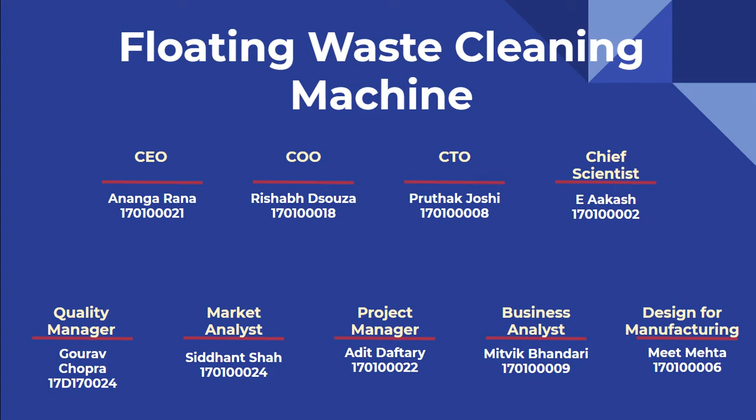We are the floating waste cleaning machine team, and our goal is to clean up plastic pollution in rivers. We know that on average, 2.4 million metric tons of plastic flows through rivers each year. Over two-thirds of these is carried by just 20 rivers, most of which are located in densely populated urban areas. Focusing on these rivers would help us tackle a large part of the plastic menace.

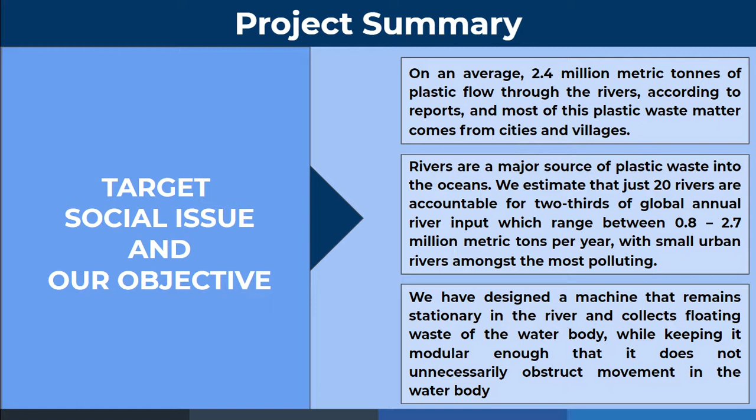In order to do so, we've designed a machine that is able to collect floating waste in the rivers while at the same time not obstructing movement within the water body. In order to arrive at the final design, we've looked at the problem that we want to tackle and we've looked at existing solutions for that problem. We then looked at shortcomings of those solutions and designed a machine that doesn't have those shortcomings.

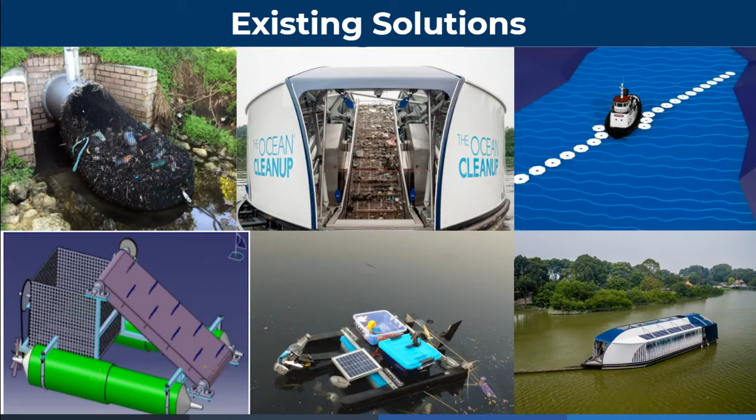The current existing solutions are of two kinds. The first are large permanent solutions which often block a large part of the water body. The problem with this is that this hinders the free movement of ships and boats and therefore can't be employed everywhere. The second type of machines are extremely small. These are able to collect only a small amount of plastic, which is inadequate for the large amount of waste that our society is generating currently. Therefore, we have designed a machine that is able to collect a large amount of waste while at the same time not blocking flow within the water body.

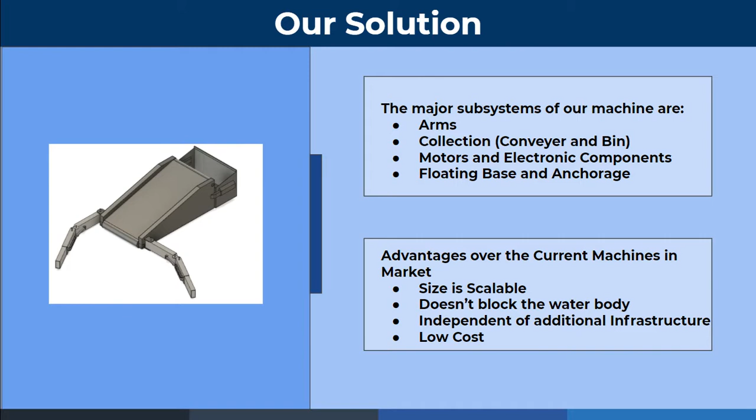Our machine is able to collect the waste through the use of two arms, which bring the floating waste to the mouth of the machine. From there, it is transported into a dumpster through a conveyor belt, which is partly submerged underwater. We've also ensured that our machine is low cost so that it can be adopted by governments worldwide. Now, let's look at each part of our machine in greater detail.

The first part is an arm, which is made up of three links. The main purpose of the arm is to cover a large surface area so as to collect a large amount of waste. The first link is made up of a mechanical stopper and is operated in an elbow-like motion. That link is able to resist the force of the flowing water so that it is able to stay stationary in water.

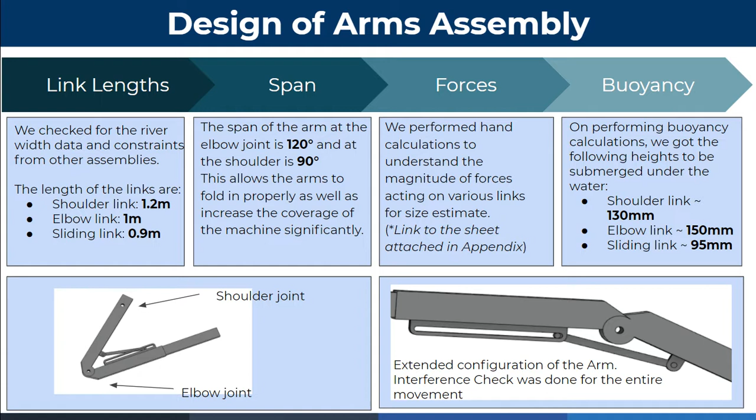The second link is operated in a bevel gear assembly which moves in and moves out with a drawer-like mechanism. The length of each link is kept around 1 meter so that the base doesn't experience extremely high levels of torque. The links are moved through motors which are going to be controlled in the base itself. Now let's look at an animation of how these links work.

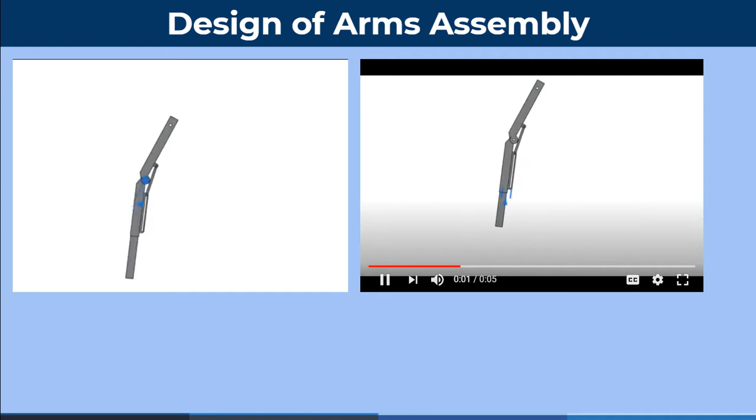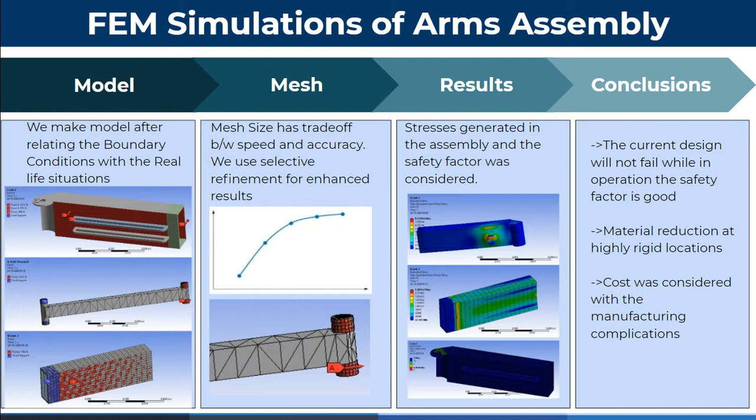We've also thoroughly done structural analysis on these arms to make sure that they're able to resist fatigue and tear in normal working conditions. We have looked at parts which are weak and we have specifically reinforced those parts to prevent against failure. Now let's look at the type of loading that is going to be present in these arms during normal operation.

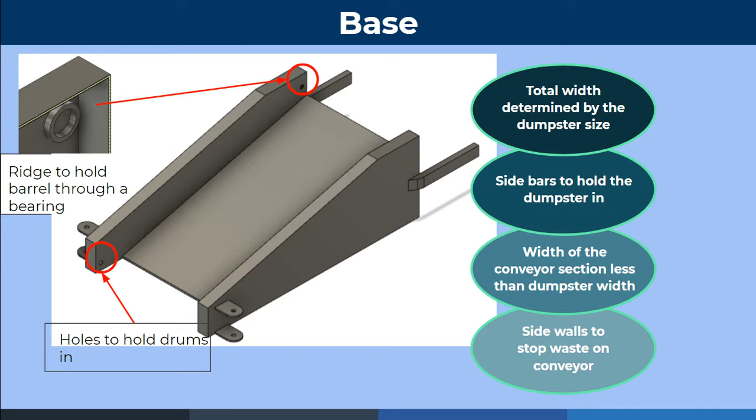The second part of our machine that we're going to look at is the base. The base is the part that holds all other parts together. The arms are joined to the base at the front, and at the rear, the sidebars are used to keep the dumpster in place. The base is made up of marine grade coated 4 mm steel, and the different panels are joined using rivets. We have ensured that the base is large enough to hold all the various parts together, but also small enough so that it doesn't obstruct the flow of boats in the river.

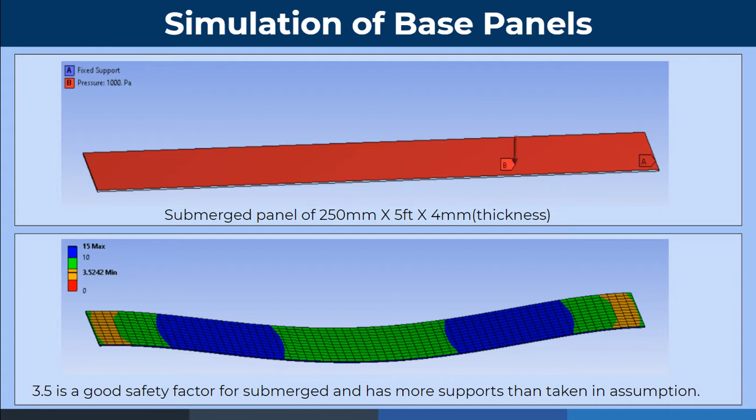We've ensured that our base is sturdy enough so that it doesn't fail in day-to-day operations. We found it to have a minimum factor of safety of 3.5, which will be actually higher in normal operations because it will have more supports than what has been taken in the simulation. We finally needed to ensure that our machine is able to float.

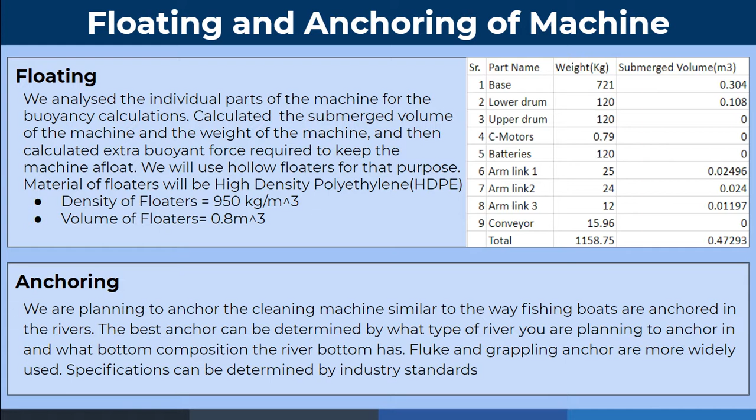For that, we have calculated the total weight and the total submerged volume of the machine, and we have found that it will require additional buoyant force. In order to provide this, we have designed hollow floaters which are made up of high density polyethylene. We've also ensured that the machine will be able to anchor in a river. We have designed different types of anchors which will be able to anchor that machine depending on the type of riverbed it is placed in.

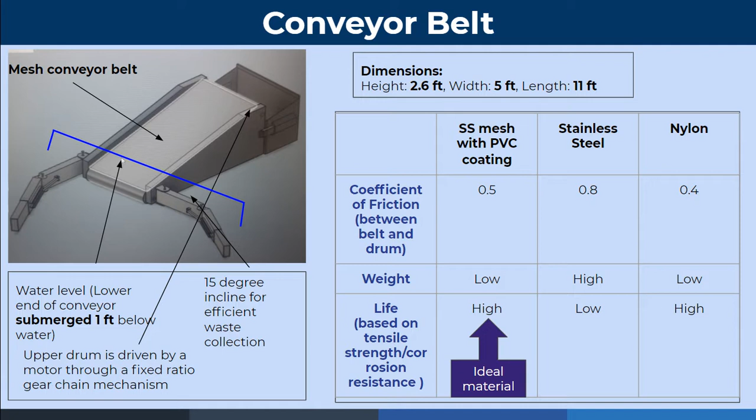The final part of the machine we're going to be looking at is the conveyor belt itself. The conveyor belt transports waste from the mouth of the machine to the dumpster. The lower part of the conveyor belt is submerged 1 foot below water, and the upper part of the conveyor belt is rotated through a motor. We have selected stainless steel mesh with PVC coating for the belt itself because it has a high life and also an adequate amount of friction.

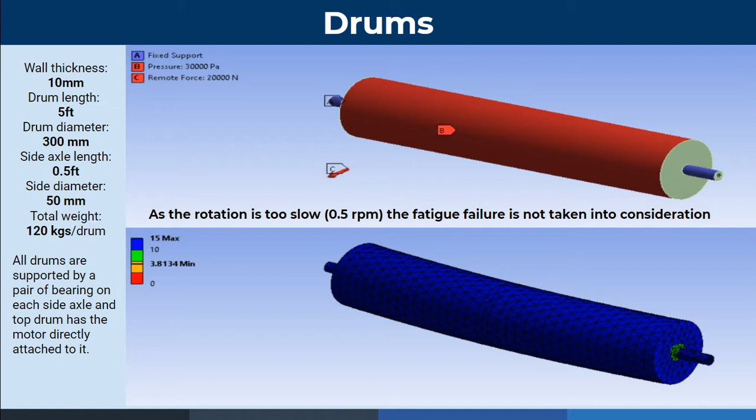The drums of the conveyor belt are what drives it. These drums are connected to a motor through a fixed gear ratio mechanism, and we have ensured that the drums also are adequately safe from failure. The motor that we have used is primarily used to run the conveyor belt. We've ensured that the motor has a high enough torque of 47 newton meters so that it can power the conveyor belt in most day-to-day operations. We've chosen the motor to be small so that it is able to fit inside the machine and doesn't

unnecessarily increase its size. The battery that powers the motor is going to be rechargeable and also lithium ion powered. This is chosen because of its high energy to weight ratio, and it is able to power the machine for up to a week on a single charge.

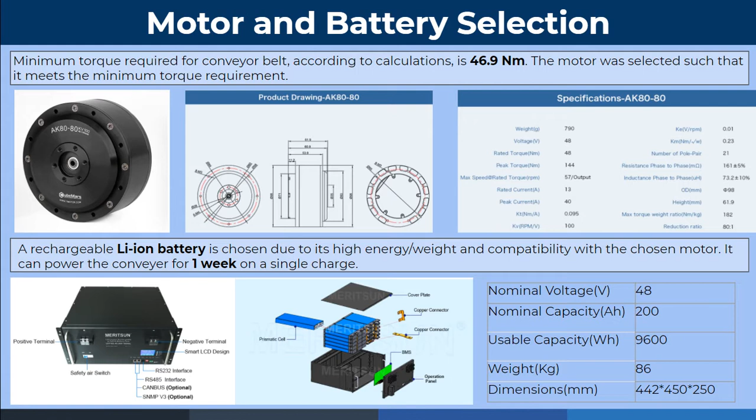The type of people we're going to target who are our potential customers aren't going to be private organizations. River cleaning is largely a governmental entity, and we think a large amount of our customers would be governments or government partnered NGOs. We think they would also be able to afford our machine because river cleaning is something which has received a high level of funding recently. For example, the Ganga River Cleanup Project has received about 1500 crores in funding, and as you will see later on, our machine only costs a very small fraction of that.

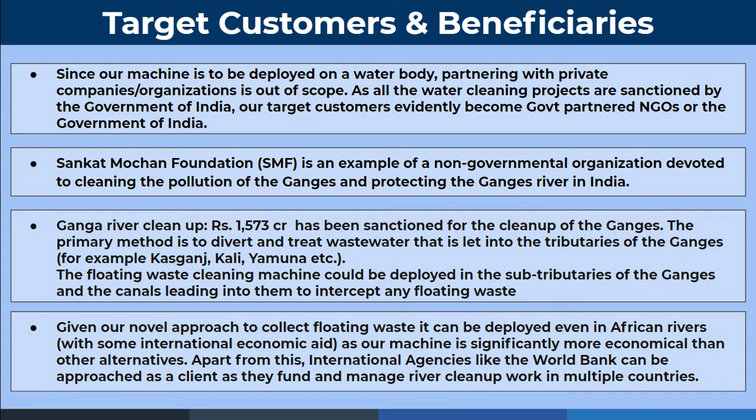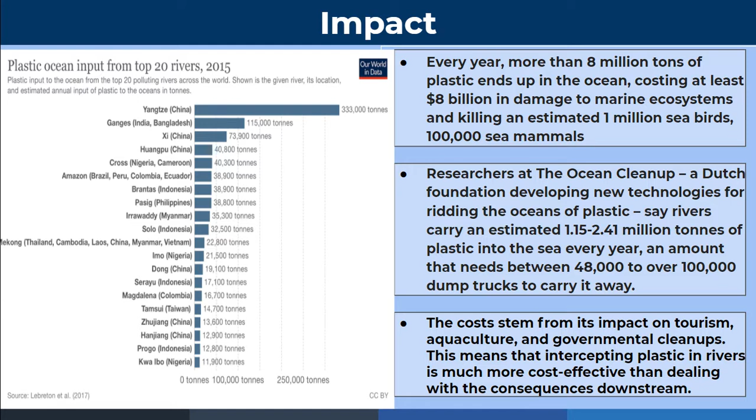We think that the impact of deploying this machine worldwide would be immense. Notice that the current cost of the amount of plastic that flows into the ocean is about $8 billion. This is the damage that is caused by plastic through marine ecosystems, through tourism in marine areas and other places, which means that a large number of entities would be willing to spend a large amount of money in order to ensure this problem is tackled. Given that we are able to clean up waste effectively, we think our machine would be able to have a very high impact when deployed around the world.

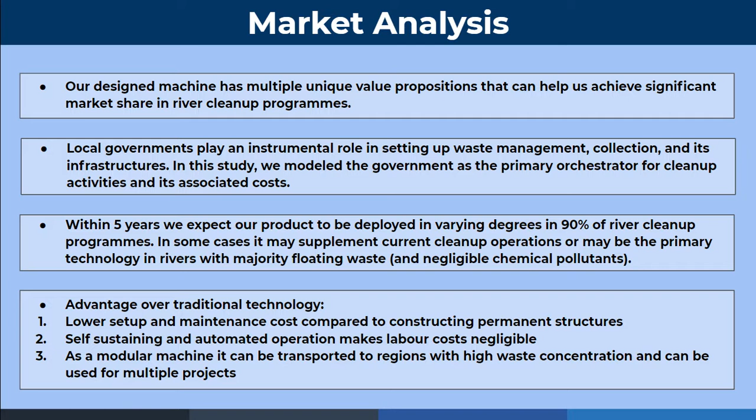Given that our machine is low cost and also has very little maintenance and running costs because of its self-automated working mechanism, we think it will be able to be adopted by governments worldwide. A large number of governments using these would ensure that a large part of the plastic waste is cleaned up and the impact that we've mentioned previously is attainable by us.

The final cost of our machine comes out to around 5 lakh rupees. This includes the fixed cost of materials, manufacturing and labor, and we think the running cost of our machine would be around 50,000 rupees, which means the total cost of our machine would be around 5 lakh 50,000 rupees, and we'll be able to get back revenue and pay back the cost of the machine in just over 3 years.

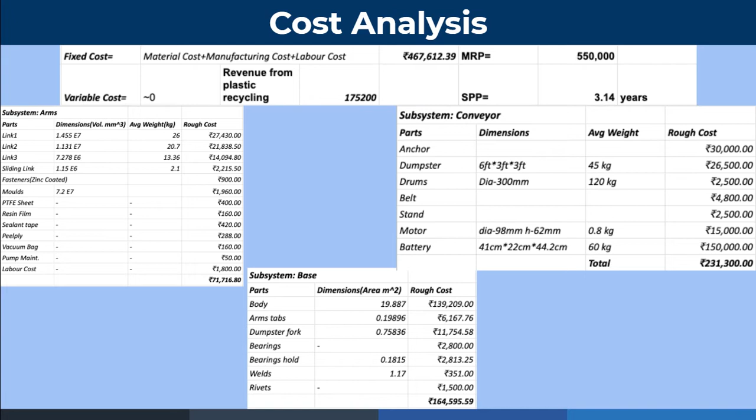This means that our machine is not only cheap in terms of its initial cost, but will also be able to pay for itself if it's used for a long period of time, which means that we'll be able to clean up a large part of the problem that is plaguing our society currently, and we'll be able to do so in a cost effective manner.